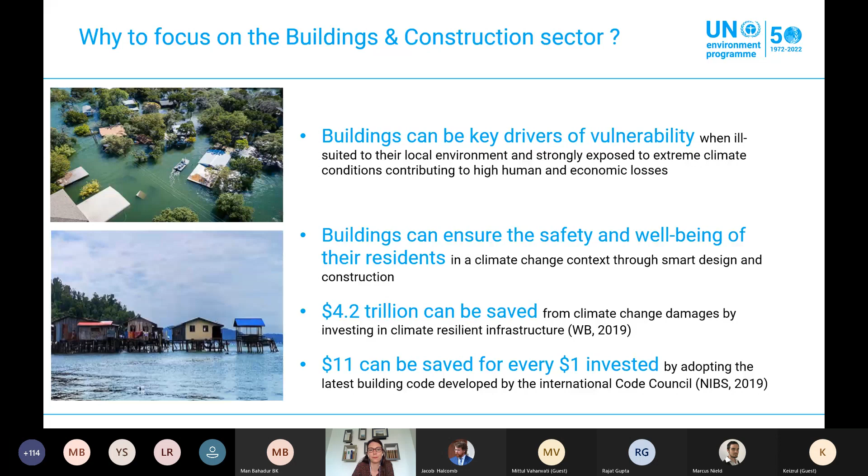A few words about the report itself. It is a user-friendly, forward-looking guide for building resilience in the construction sector. It is the result of a close collaboration between UNEP Climate Change Adaptation Unit and UNEP Cities Unit, and it is also the result of collaboration with a broad team of experts coming from different backgrounds, including the academic and research world.

It is focusing on concrete solutions. It provides ways in which buildings and community spaces can be constructed to increase resilience to impacts of climate events, including heat waves, floods, and storms. It is tailored toward the developing country context and a built environment that is largely self-constructed. But all the proposed solutions in the guide can also be upscaled and applied to different building types, and it can be used for more formal settings, including apartment complexes, hospitals, or schools.

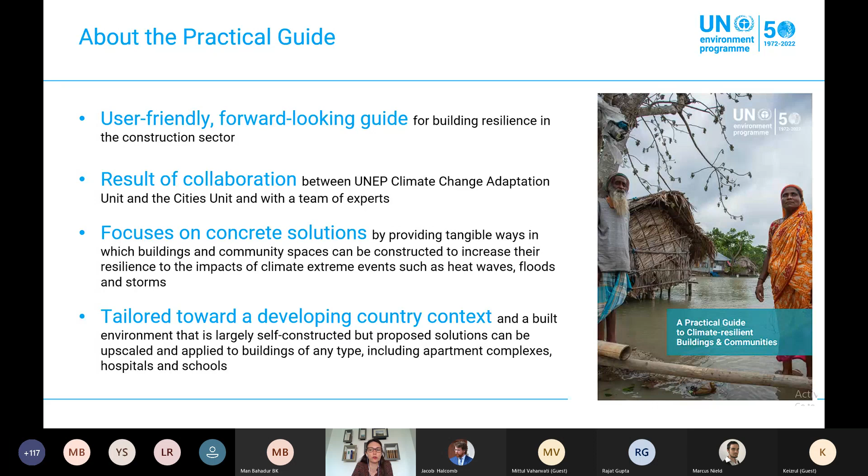To finish, a few words about the audience and the main use of key findings. The practical guide is aimed for a broad audience, including people with little experience in the building and construction industries. It is aimed for government line ministries, development and adaptation practitioners, and also community members.

It will guide efforts to achieve SDG 1, 11, and 13, looking at ending poverty, building sustainable cities and communities, and mitigating climate change and its impact. All of those SDGs have targets around resilience and adaptation.

The aim of the report is also to inform future adaptation programming and respond to the growing demand of UNEP member states regarding the need for additional support around urban adaptation and resilient buildings. It can also be used to support the national adaptation planning processes ongoing in several countries, with some including specific activities around updating and revising key building codes.

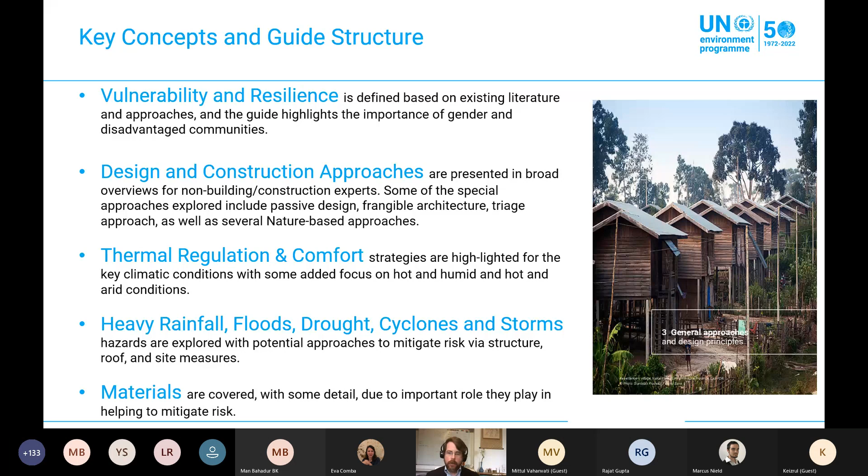We also look at heavy rainfall and floods, droughts, cyclones, and storms. These hazards are explored with potential approaches to mitigate risk via the building components I've mentioned earlier: the structure, the roof, and specific site measures. We also cover materials in some detail due to the important role they play in helping to mitigate risk, and this is an area where there is some fairly technical information in the report to help with discussions between the different practitioner communities.

I just want to touch on some of the key summary recommendations towards the end of the report. Resilient people equal resilient buildings, and they really come together hand in hand. Attention should be paid to the needs of the inhabitants and building users of all ages, gender, financial means, and physical ability.

The buildings' risk reduction and adaptation really benefit from whole of life thinking. And that is not only for the buildings and the materials used in those buildings, but also where the development occurs, the design and orientation on the site, and then also looking forward into how the climate is expected to change over that whole long life of a building.

We also strongly encourage that the design and construction is locally rooted. It's important to consider the availability of materials, the availability of the local labor pool, the ecological health of the community, resource supply chains, skills and training, and other things, so that the solutions proposed and adopted can be maintained and well adjusted to the local community. It's also important to have government goodwill, really government leadership on this, because one sector or one key actor can only do so much.

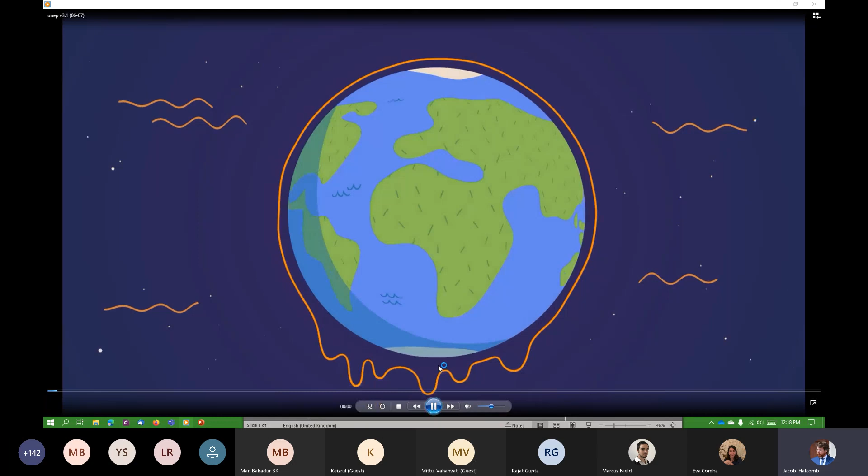The global climate is changing, and people everywhere are feeling the heat, the increasing storms, and the rising floodwaters. These disastrous climate change impacts are especially severe for those living in developing countries. But our homes and buildings can provide refuge from climate disasters. In fact, investing in well-designed, resilient buildings is one of the best ways of adapting to climate change. It can save, quite literally, trillions of dollars worth of damages. Let's look at some examples.

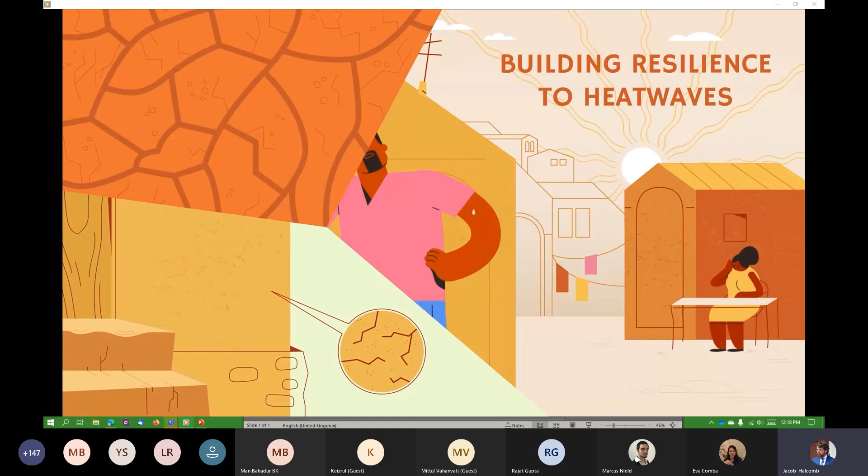Rising temperatures are leading to more heat waves and droughts, which impacts the soil and can damage foundations and building materials. Extended periods of heat also increase the likelihood of fire, posing a risk to people and their homes. To adapt, we can position buildings to capture the winds. Outer walls can be strategically built to channel cooling breezes indoors.

Crucially, nature offers additional solutions. Plants can be grown around a building to provide shade, reducing indoor temperatures and making interior spaces more comfortable. Specific species, such as tall palms, are often an excellent choice, blocking the sun while allowing welcome breezes to pass through.

Climate change is whipping up more intense storms, including cyclones and hurricanes, wreaking havoc on coastal communities. Buildings can be modified from the ground up into more wind-resistant shapes. Roofs can be redesigned with multiple slopes that perform better under wind forces. Connections between the walls and the roof can be reinforced with better, more secure attachments.

Again, nature can provide solutions. Coastal ecosystems such as mangrove forests reduce wind speeds. They also limit coastal flooding caused by storm surges, as they can absorb the energy of the waves.

Climate change is leading to unpredictable rainfall patterns in many parts of the world, resulting in floods that destroy homes. Since the start of the century, floods have affected more than 2 billion people.

Again, we must rethink from the ground up. Homes in floodplains can be elevated on stilts, allowing floodwaters to pass underneath. Building materials must be properly chosen and matched to the site conditions, which will help the home stay drier.

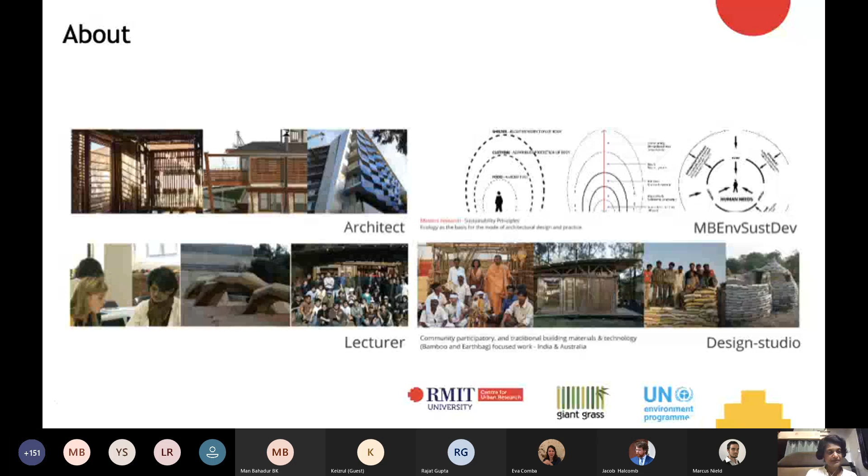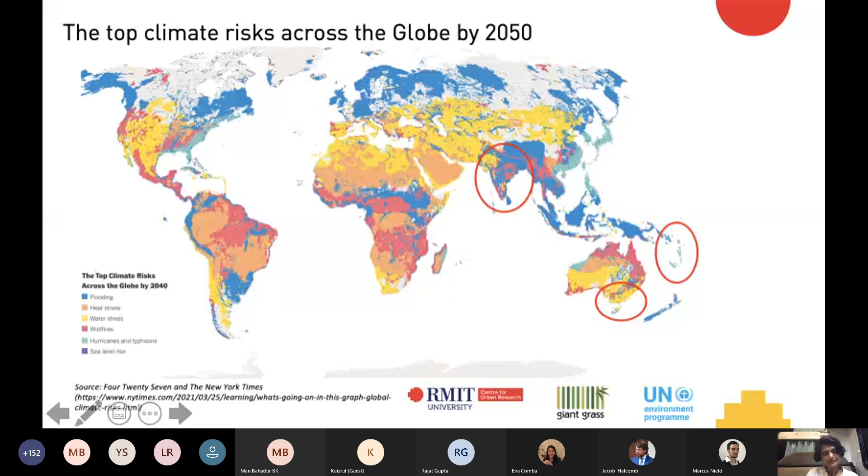This is one of the maps developed by the New York Times and Four Twenty Seven, trying to showcase the areas in the world which will face multiple hazards. These are the 3 regions I have focused on in my research and work so far: India, the Solomon Islands, and Australia, the southern part, Melbourne, where I'm based.

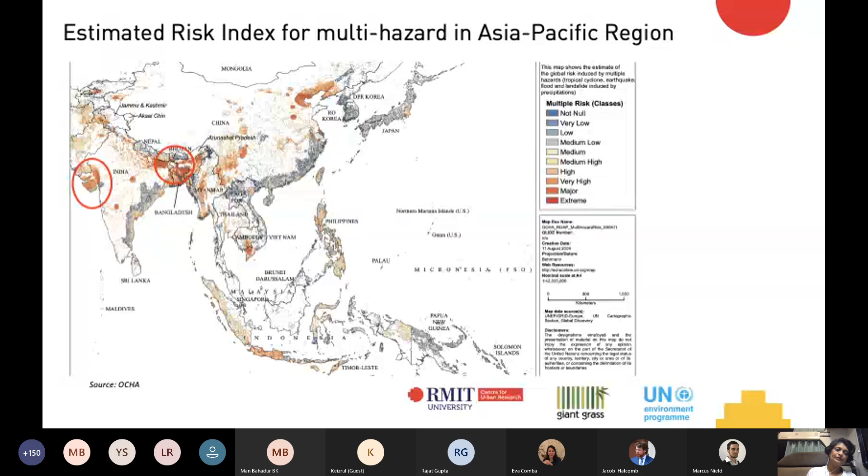In the Gujarat area of India, which borders Pakistan and has a little desert region in the top corner, it is a dry, arid area. The traditional homes used to be mud, wattle and daub, mud-plastered, circular buildings with thatch roofs. In the earthquake, nothing happened to this typology of housing, but of course it led to a lot of cracks, and with increasing drought, these sorts of grasses are not readily available.

This was the second deadliest earthquake registered in the history of India, and had massive impact. The local NGO went ahead and developed this design in close collaboration with the settlement owners, elders, and women, and the form of the building was retained. The idea was to develop a multi-hazard safe house - not just one safe from earthquake or drought-tolerant, but also one good for cyclones.

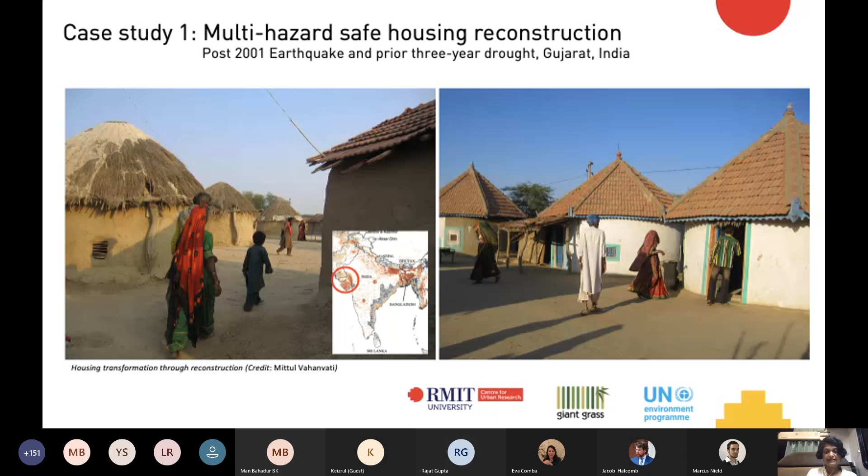In another part of India, Gujarat, where there is stone construction, another NGO modified that technology slightly more and introduced a triangular reinforced concrete slab for earthquake safety, columns at all corners, and 4 bands of beams - at ground level, below the window, above the window, and at the roof level.

This area also has a lot of cyclones, so as you can see, there's a little parapet above the roof on either side of the walls.

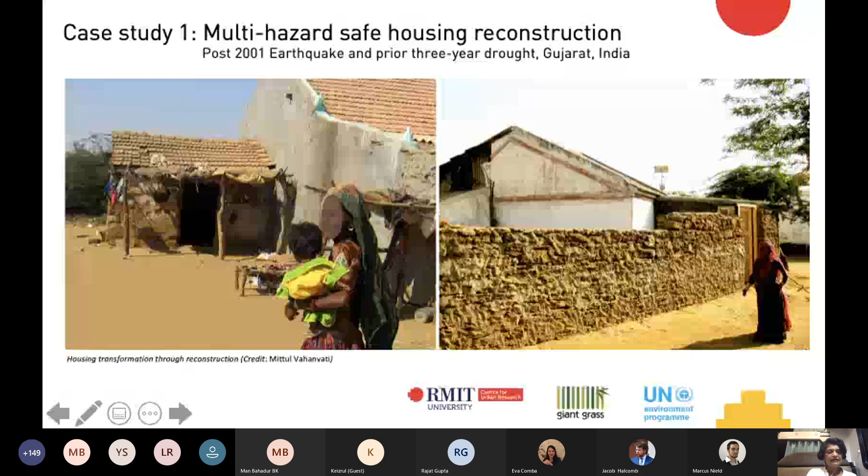In the case of Northeast India, which is at the foothills of the Himalayas and has similar landmass as Bangladesh, it's very riverine, with flat alluvial plains, and the landmass constantly changes with the hydrology. There is abundance of bamboo and thatch.

As you can see in this image, this was the traditional house form. Every season, annual monsoonal rains would wash away these houses, and they would have to start again.

So the local government, for the first time, had an extensive housing reconstruction strategy after floods. Typically, their response in the past was just to provide money to people and say, rebuild your house. But this time they said, no, we want to make the houses disaster resilient.

Extensive training was done of local people, artisans collaborated with architects, engineers, and local government members. And these two technologies were found most appropriate.

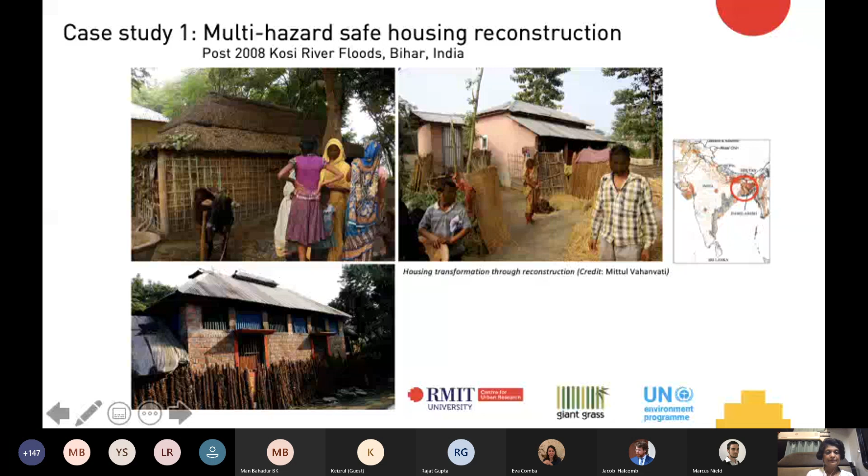This area is prone to earthquakes, storm surges, and cyclones, and annual floods, of course. So an attic was made mandatory for any houses that were reconstructed after these floods. As you can see, above the attic there is no plastering, to allow for ventilation.

All the walls had to have these diagonal bamboo members to have more strength, and each house was built lifted above ground and had to have a pile foundation.

But if you can imagine, in areas where there is a high water table, it is very difficult to dig deep. The moment you dig, there would be a lot of water. The water table was just 1 meter below ground.

So local artisans, as you can see in this right-hand side image, came up with the idea to use a barrel of oil, put it in the center, and have a person at the bottom in the barrel pulling out the water and passing it to someone standing above to create that hole. A lot of innovative ideas were generated from the local people themselves because they knew their context really well.

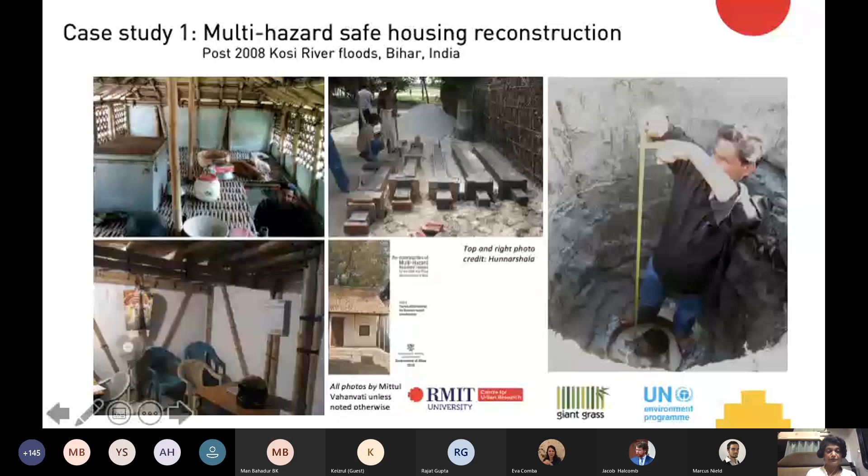So over these 3 case studies that I examined, in Gujarat after the earthquake, in these 2 places immediately after disaster, really resilient homes were created. I was interested in knowing whether people are replicating those technologies 10 years after media attention has gone away or NGOs have moved out.

In the case of this settlement, people started changing the shape of the houses. This may not be as earthquake resilient, and local people knew that, but they wanted to have square houses to accommodate mattresses and things like that.

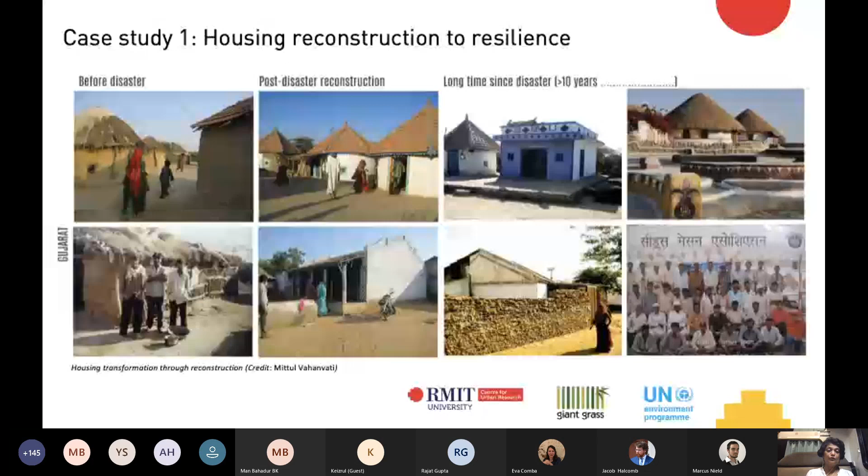In the second settlement, the technology continued with all the resilient features, and that can be attributed mainly to a mason association formed locally with the NGO's support. These masons were trained in international standards for earthquake-prone region construction, so they have flown overseas to help other masons by training them how to build in earthquake-prone zones.

In the case of Bihar, it was too early to know what the long-term impacts would be, but these rat trap bond houses were being replicated.

Based on the findings, I came up with this framework, and I won't go too much into detail of this, but it is very important to understand the housing in a broader systems context.

And to develop a process and a reconstruction program that not only addresses the need of building a brick and mortar house, but also provides services or labor or whatever is essential.

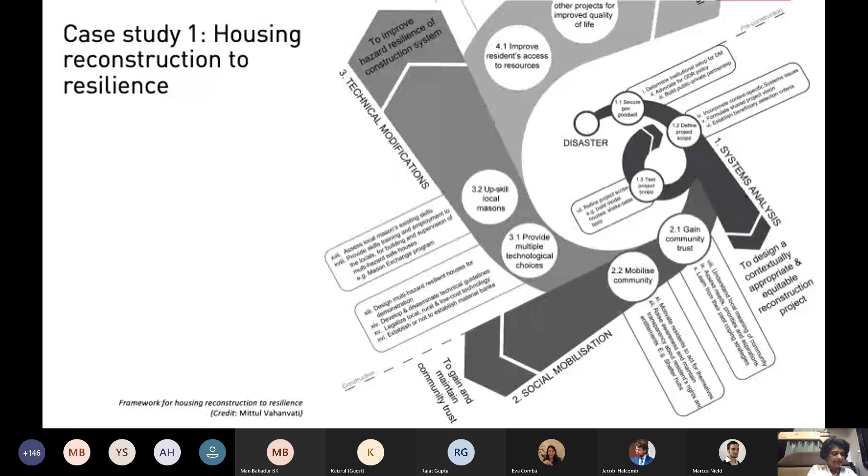I'll just quickly go through the second one. Currently, I'm working in Honiara, Solomon Islands, as a researcher.

It's an action research project funded by UNFCCC Adaptation Fund, led by Professor Darryn McEvoy. My team is looking after nature-based solutions for urban space resilience.

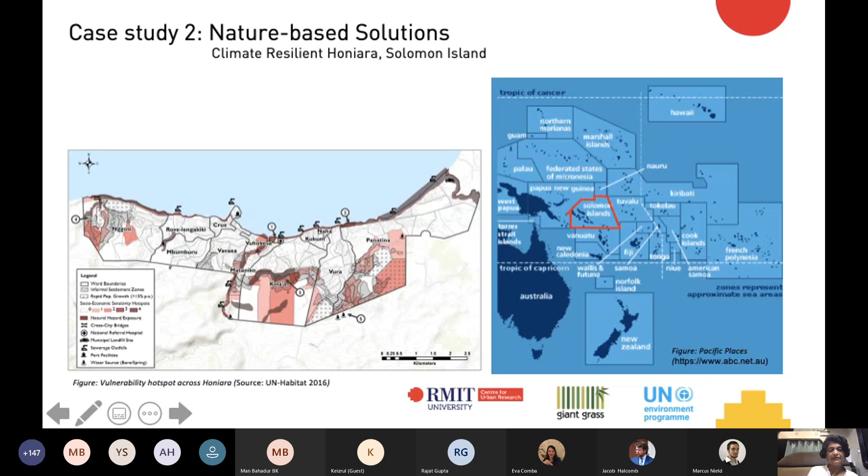This is an image giving you an understanding. It's a hilly area where rainforest meets the reef, and the houses are made out of natural materials like leaves and grass, but more modern ones use concrete piles and timber homes.

So a nature-based solutions lens was applied, and an understanding was developed of how urban development and disasters come in contact with the natural environment and what the consequences are.

An operational framework was developed that lets you define the problem, conduct ecosystem hazard and risk assessment, develop a nature-based strategy, and then lead to financing and implementation. We have gone through the first two stages; the third stage is still in process.

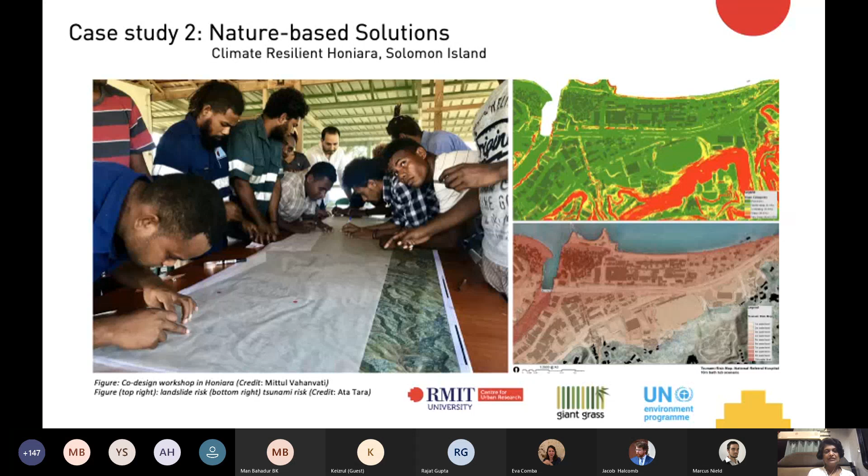We printed out large-scale maps and did a workshop with graduate students from Solomon Island National Institute to understand the cultural meaning of these disasters and risks.

We came up with some design solutions with them, and at the same time I took courses along with my colleagues, Yazid and Ata. They did studios with students in Australia, in Melbourne at RMIT, and came up with nature-based solutions for reducing landslide risk and reducing the flow of water so it doesn't take everything down with it, while also providing food and water sources for people.

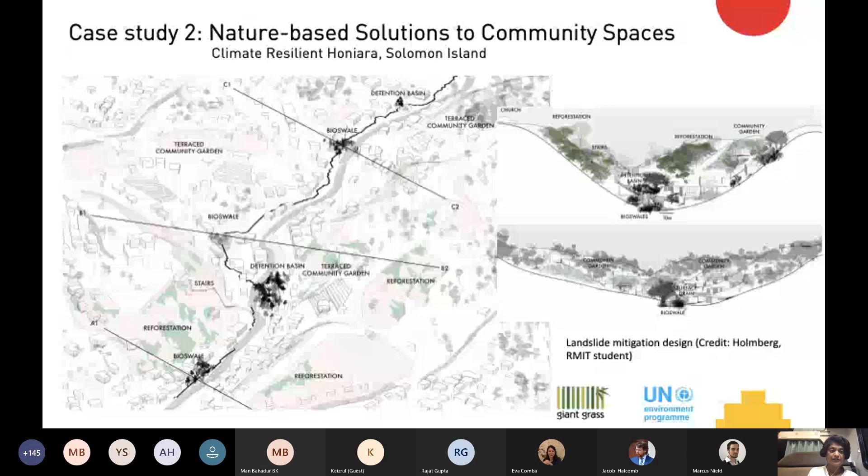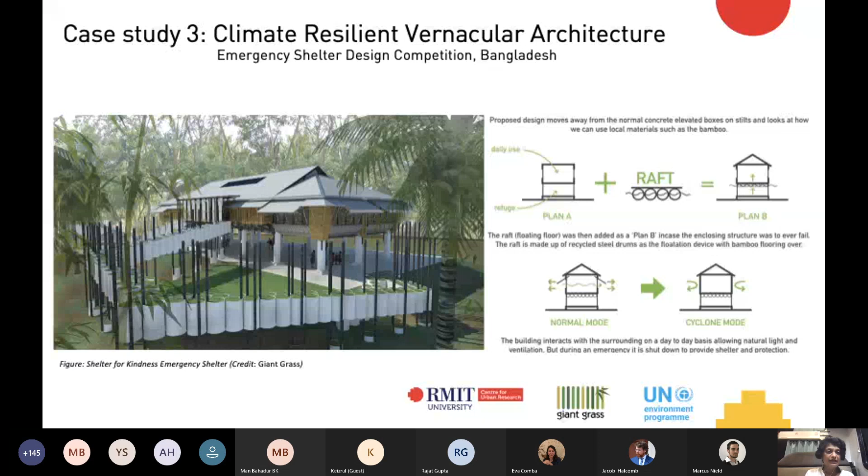At Giant Grass, we participated in a competition to develop a climate resilient emergency shelter for Bangladesh. This design was shortlisted, using local barrels and a technology where the floor would lift like a raft, with everything above the floor built out of bamboo. I think I should leave it there.

What my design and research projects have focused on so far is either post-disaster reconstruction, earlier in rural areas, but now more so on pre-disaster preparedness and building adaptive capacity in the Pacific and in Australian regional towns.

This project has just finished. In the regional town of Australia, the houses are heritage listed, but the majority of them do not comply with bushfire safety standards because they were built before the codes existed.

Together we went through an extensive two-year project where we co-produced an understanding of risk and of strengths, and developed an action plan of what needs to be done. Believe it or not, of the top five priority actions, the first one was built environment and its safety.

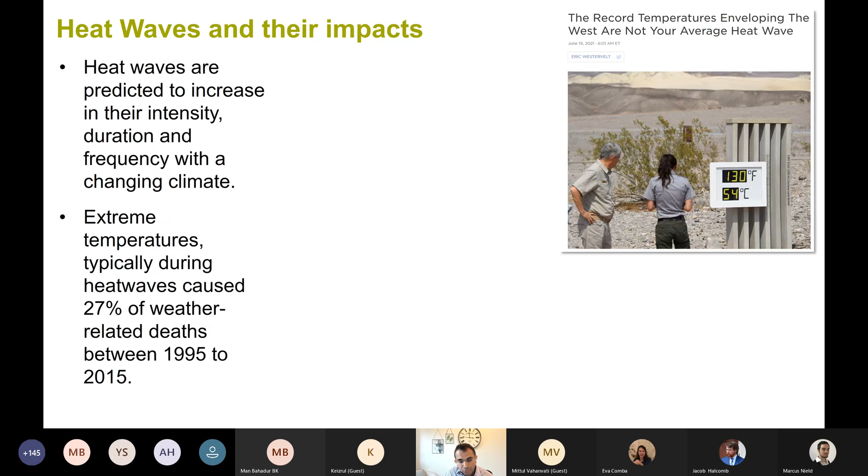Coming to the challenge of heat waves and gradual increase in temperatures, everybody is now clearly aware that we see this on a daily basis. We know that heat waves and hot weather are predicted to rise, whether it's intensity, duration, or frequency, with the changing climate.

We've seen what's happening around the world, across Europe, across South Asia, and very recently in the US and Canada, where temperatures began hitting the northwest at about 50 degrees Celsius, temperatures that haven't been witnessed before, and those things are only going to become more commonplace. I think it's also responsible for an increasing number of deaths.

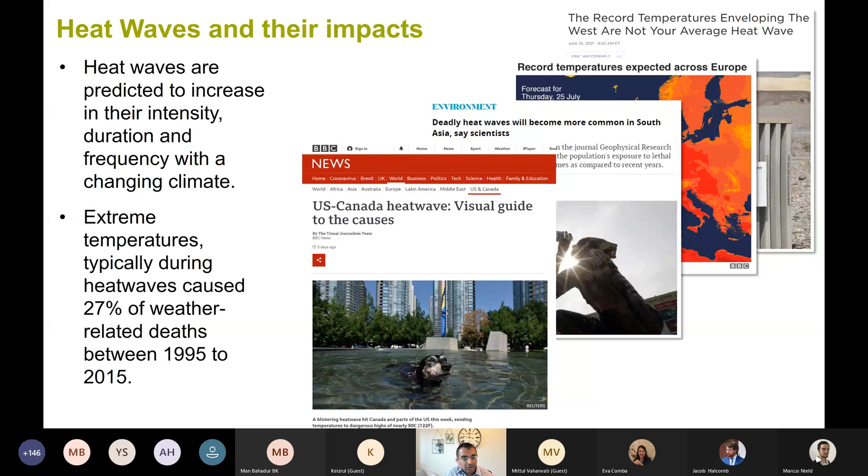We are also seeing a rise of temperatures even in temperate climates, and that's also a worry. This gets even more exacerbated by poor building design and operation, because buildings are not designed to manage heat. We also have in cities what we call the urban heat island effect, where you have higher temperatures in the city than in rural areas, and this can be further exacerbated by housing density and housing quality. So building design matters, and the systems themselves also get affected by heat.

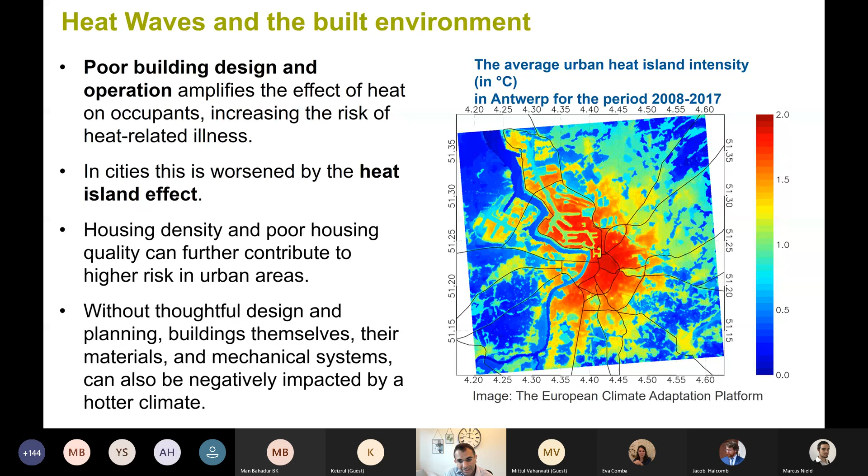People and buildings interact because people control buildings to suit themselves in the climatic context, and buildings modify the climate to suit occupants within their cultural norms. Culture and preferences are partly determined by climate, and people's clothing is also determined by the climate they are in. This is a fairly important dynamic relationship that should always be considered as we look for climate change adaptation solutions, to avoid not getting the outcomes we want.

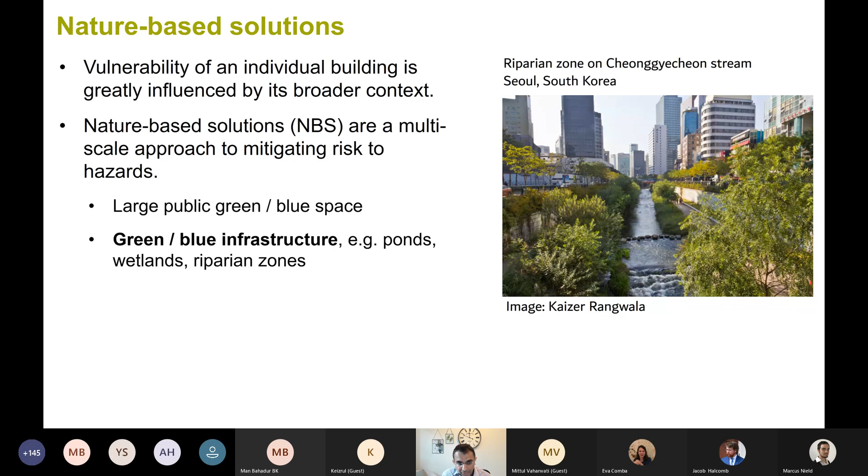To give you some solutions, some of which Mittul has also alluded to: nature-based solutions are important for building resilience to heat, because you get multiple benefits. The vulnerability of an individual building is influenced by the broader context—access to public green-blue spaces, green-blue infrastructure, green roofs—all of these matter as we move towards a warming climate. They also have other core benefits beyond managing heat, such as flood management, drought management, and even resident well-being, as we've realized during lockdowns how important it is to have access to a good park to go for a walk.

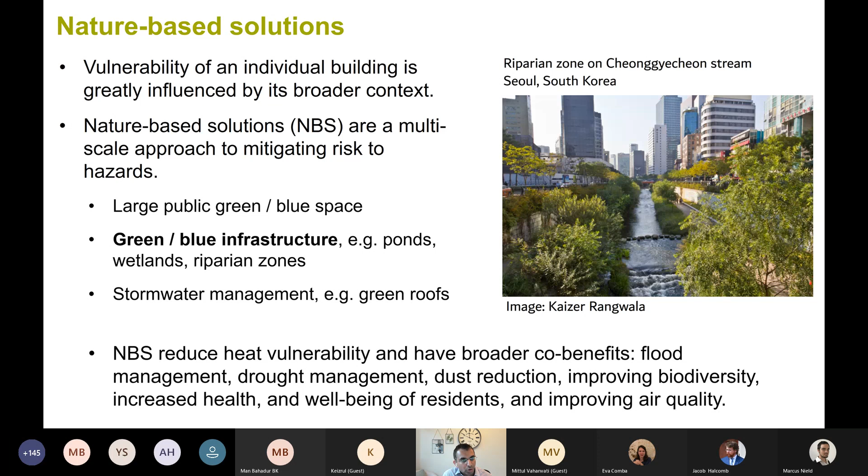In terms of buildings themselves, beyond infrastructure, building site and orientation matter. We must not forget that we can arrange trees and other buildings to provide shading for new buildings. Vegetation can also help with wind flows for natural ventilation. We should try to minimize east-west facing wall lengths because the sun is either very low or very high, and it's quite difficult to block that sun in the summer.

So it's important to minimize windows facing those orientations. Reflective surfaces matter too—I'll talk about that later with a case study, since it's a relatively easy way of reflecting heat away from a surface. Common or shaded walls reduce heat gain, meaning row housing is actually good from a heat management point of view. Compact building forms matter—the technical term is perimeter-to-area ratio, and you should try to minimize that.

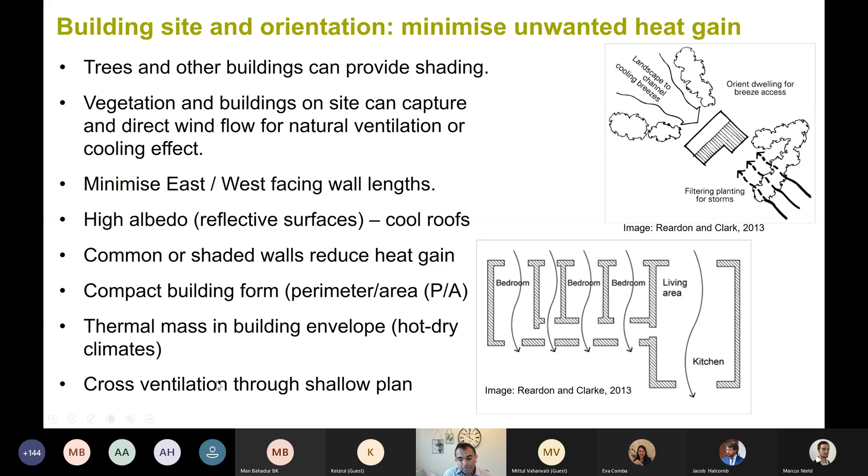Thermal mass helps in hot, dry climates. In certain climates, you want lightweight construction instead—if it's warm and humid, you might want to dissipate heat quickly. But in most climates, cross ventilation through shallow building plans matters, which is something gaining attention because of COVID, but also important for getting rid of rising indoor air pollutants.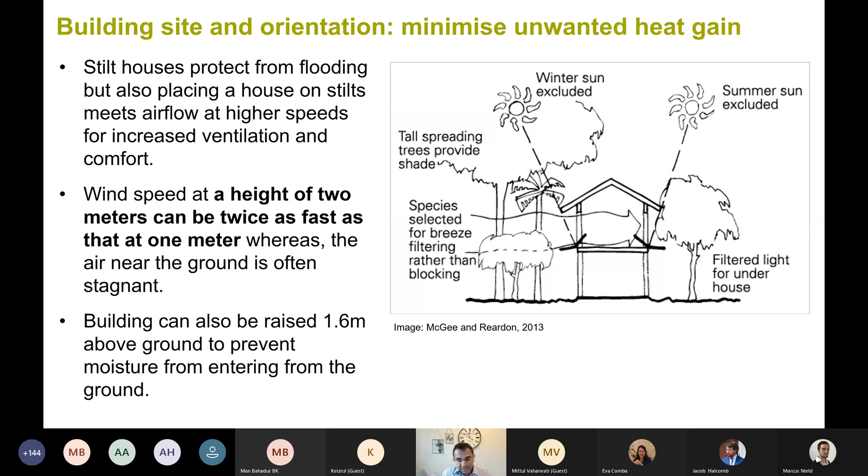The other thing to be careful of is there's growing movement about having homes on stilts, because it's protected from flooding as well, but also you can gather higher airflows at higher speeds. Wind speed at 2 meters can be twice as fast as at 1 meter, so it makes sense to raise them.

There's also a single most effective passive measure for keeping the heat out, and that's shading. External shading matters, whether it's adjustable or fixed shading, which might have some limitations but still gives the desired outcomes. If you combine that with highly reflective walls and surfaces, you're able to dissipate a lot of heat gain away from the building and reduce thermal discomfort.

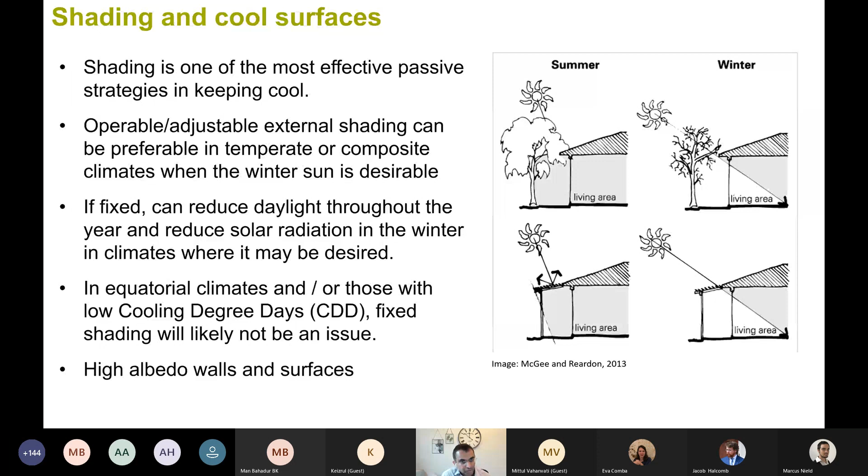Just to pick up a few case studies: this is a green affordable housing project in Chennai, India, in a warm, humid climate. It was designed to maximize cross ventilation for comfort, which is important because it minimizes air conditioning usage. It has a large number of flats, 604.

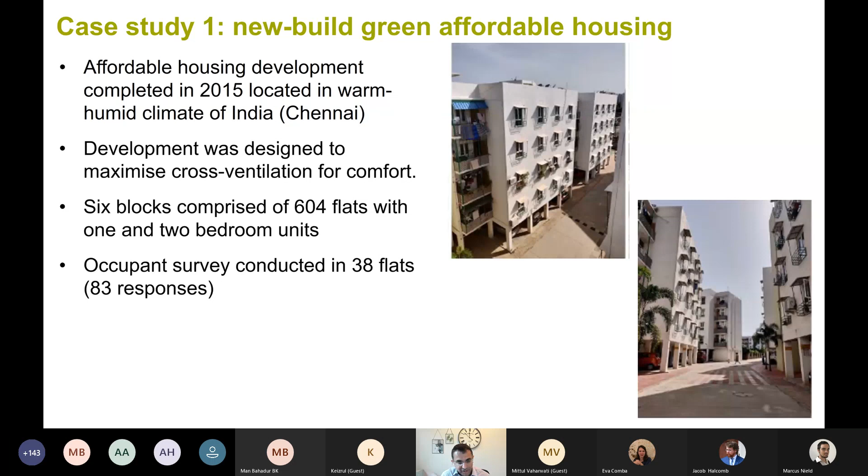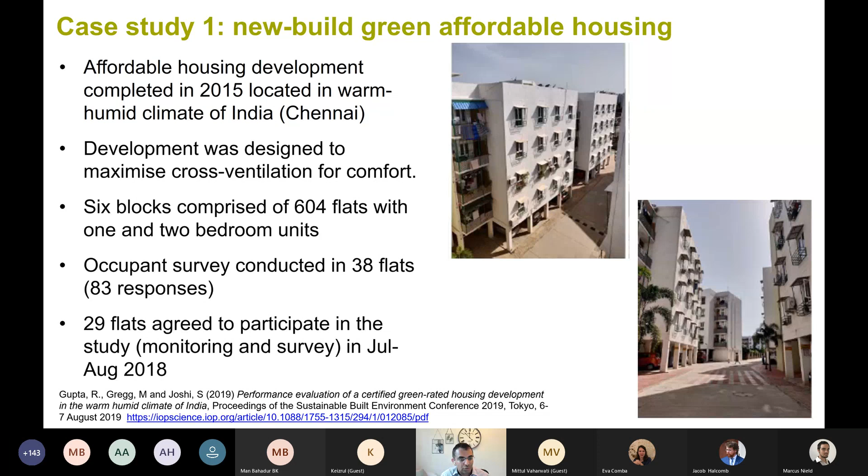We managed to do actual performance studies, building performance evaluation of these flats. We conducted occupant surveys across a number of flats, and did some monitoring in one of the summer monsoon seasons in India. It's been published, and I've given the link so you can read all about it. I'll give you some headline findings because I think they're quite important to understand.

One of the things we found when we looked at energy was that, despite the intent of keeping it cross-ventilated, some people installed air conditioning units, but not all used them—that's because it's affordable housing after all. Despite having these units, there were long periods of time when the AC flats were naturally ventilated, and where AC was used, there was a rise of about 32% more energy on an annual basis.

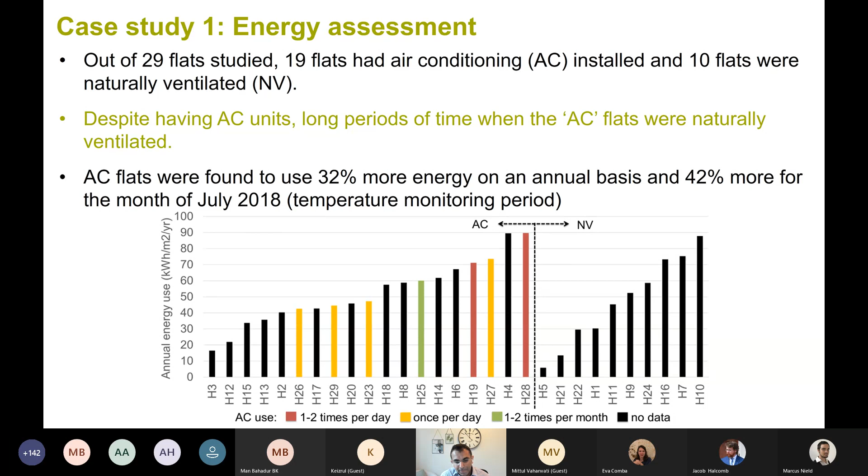But what's interesting is, despite more energy being used, the indoor temperatures in naturally ventilated flats compared to flats with air conditioning units did not have much of a difference—only 0.2 degrees difference between the measured indoor temperatures, which means the cross ventilation strategy was working well. If you look at this graph, the two lines are quite similar; if I removed the labels for AC and naturally ventilated, you wouldn't be able to tell them apart.

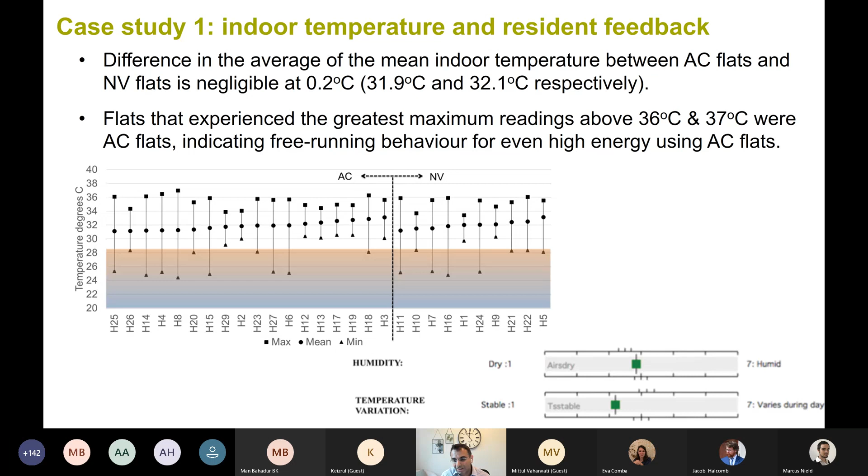People we surveyed had very positive actual experiences of the development. They don't find it dry and they don't find it humid—it's somewhere in between. The temperature variation, which can be a big problem in some naturally ventilated buildings, was not there. The green on the chart means it's a good thing, and conditions are considered to be pretty stable.

Another case study, from a shading point of view, is in Vietnam, where the vernacular design imposes large openings facing south, both to enhance daylight and natural ventilation. There are louvers and shutters which shade the openings, and a two-layered window provides flexible, operable control during both hot and cold periods. The front corridor itself acts like a buffer to the inner space from both sun and heavy rain, and it's painted white so it can reflect a lot of heat as well.

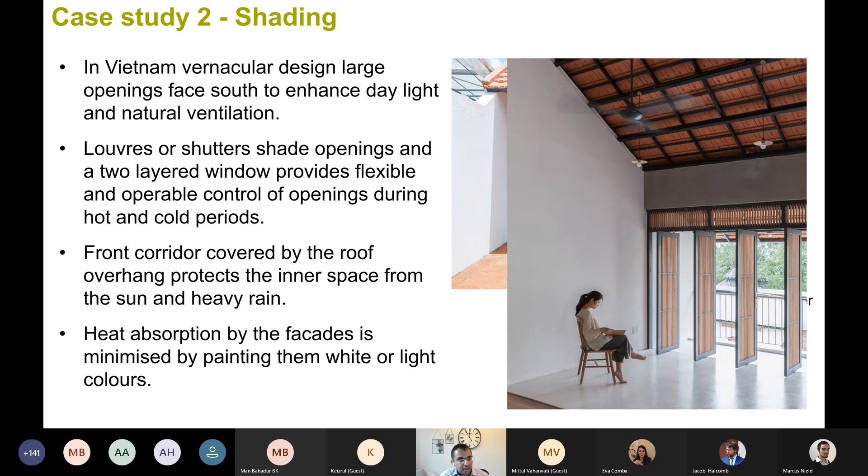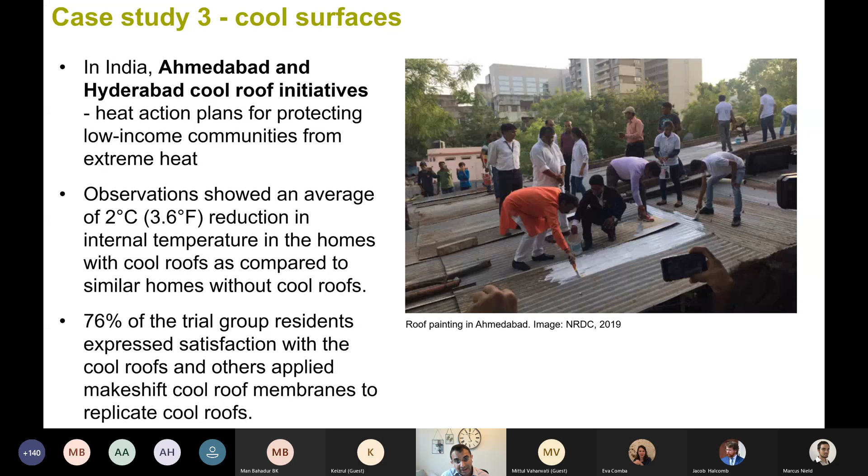So there are a number of these solutions, whether you apply it as a neighborhood solution, an infrastructure solution, or a building-level solution. Some of the stuff that I'm showing is very much on the measurement side, to show that actually some of these things do work in reality.

So, final thoughts. I think Jacob did allude to it, but in the context of building resilience to heat, I think these are really important, because heat management, as I said, is not visible. So you are almost tackling something which you don't see. Keeping paying attention to the needs of inhabitants and users is necessary, because otherwise most of the solutions will probably not work.

I think from a resilience-to-heat perspective, we must learn to design for a future climate. At the moment, you would be surprised that most of the modeling that's done is for a past climate, which is really not correct, because buildings last about 50 to 60 years.

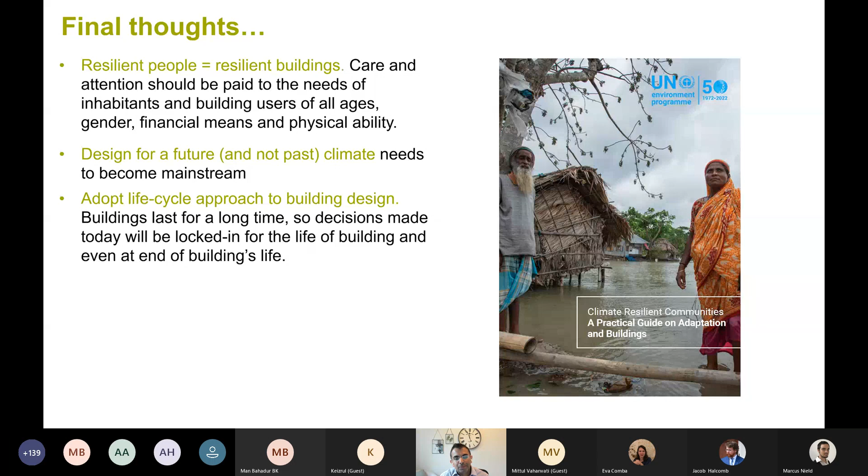We also need to adopt a life cycle approach to building design, because buildings last a long time, and if you don't do that, then decisions made today will be locked in for the life of the building, and even at the end of its life.

Again, Jacob had alluded to this, but locally rooted design and construction solutions must be encouraged, even for building resilience to heat. I think this is where governments really matter. Individual action is necessary and important, but is not a substitute for government policy and action. If we want to do adaptation at scale, I think we must have the will of the government and policymakers.

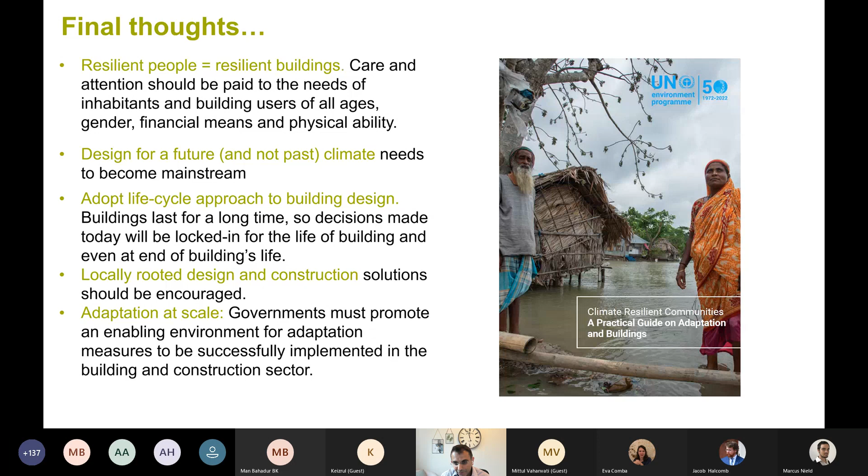And I think one of the things that we can do is to share good practice as much as bad practice, to ensure that we are learning from both sides of the coin. I think I'm going to stop here because I've also run out of time. So over to you, Jacob and Marcus.

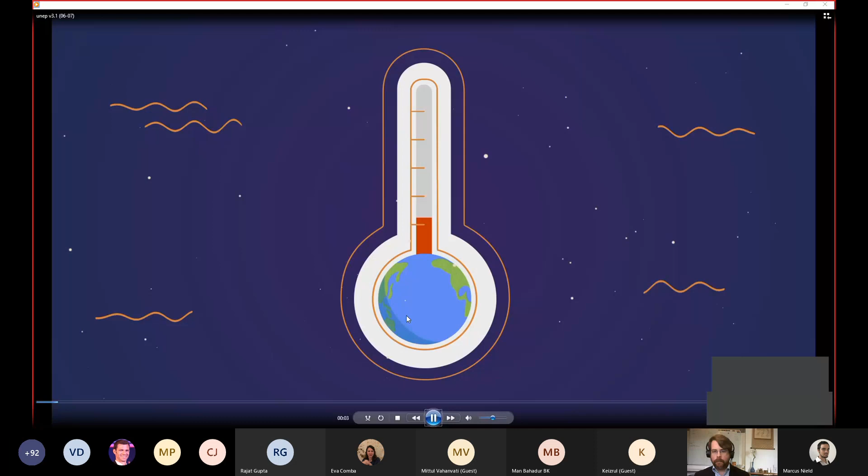The global climate is changing, and people everywhere are feeling the heat, the increasing storms, and the rising floodwaters. These disastrous climate change impacts are especially severe for those living in developing countries. But our homes and buildings can provide refuge from climate disasters. In fact, investing in well-designed, resilient buildings is one of the best ways of adapting to climate change. It can save, quite literally, trillions of dollars worth of damages. Let's look at some examples.

Rising temperatures are leading to more heat waves and droughts, which impact the soil and can damage foundations and building materials. Extended periods of heat also increase the likelihood of fire, posing a risk to people and their homes. To adapt, we can position buildings to capture the winds. Outer walls can be strategically built to channel cooling breezes indoors. Crucially, nature offers additional solutions. Plants can be grown around a building to provide shade, reducing indoor temperatures and making interior spaces more comfortable. Specific species, such as tall palms, are often an excellent choice, blocking the sun while allowing welcome breezes to pass through.

Climate change is whipping up more intense storms, including cyclones and hurricanes, wreaking havoc on coastal communities. Buildings can be modified from the ground up into more wind-resistant shapes. Roofs can be redesigned with multiple slopes that perform better under wind forces. Connections between the walls and the roof can be reinforced with better, more secure attachments. Again, nature can provide solutions. Coastal ecosystems such as mangrove forests reduce wind speeds. They also limit coastal flooding caused by storm surges, as they can absorb the energy of the waves.